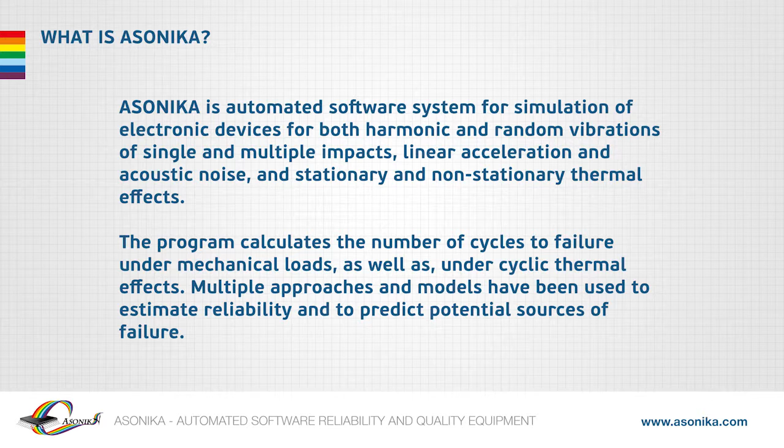The program calculates the number of cycles to failure under mechanical loads, as well as under cyclic thermal effects. Multiple approaches and models have been used to estimate reliability and to predict potential sources of failure.

Asonika is a substitution of electronics testing by computer modeling for heating, mechanical, electromagnetic, and other effects before its production. It's a considerable economy of funds and reduction of terms of equipment creation, with the simultaneous promotion of quality and reliability due to a reduction in the number of tests.

In the course of 40 years, we have been creating and have approved this breakthrough technology at many Russian enterprises, first of all in military, space, and aviation branches. The gist of the technology is the following.

Using the developed Asonika system with the help of a computer, one can oversee and prevent all possible damages and overheating of the electronic equipment placed at military, space, and civil projects. All this can be done in the course of several hours and in a very obvious way.

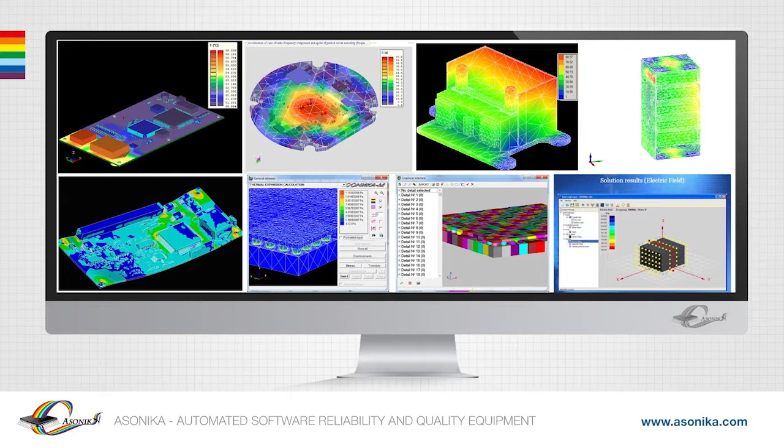Here are some fragments of electronic equipment damage and overheating acquisition. Places of possible overheats and mechanical overloads are highlighted in red. Asonika was used here.

Today the market is loaded with a quite ample quantity of programs, application program packages, and systems: Nastran, ASKA, Cosmos, ANSYS, MARC, etc. An analysis of the main characteristics of these programs shows that the best adapted for tasks of multiple survey and characteristics of electronics is the Asonika system, because there are no enumerated drawbacks of programs that allow this needed effect.

These drawbacks are listed as follows. First, an absence of models and algorithms which take into account peculiarities of functional implementation and the needed range of influence of stabilizing factors on the electronics output characteristics. Second, because of an absence of specialized graphic interfaces for normal design implementation of electronics, implementing normal design up to every electronic component of the computer needs much time in the required timescale.

Third, universal software packages demand special knowledge of an electronics developer in the sphere of mathematic modeling of mechanical processes, which it doesn't have in most cases. Fourth, the underlying models require much time with respect to electronics, from several hours to several days and months, for calculation of every electronic component, optimization, and dispersion.

Fifth, there are absent databases with required geometrical, physical, and mechanical parameters of electronic components and materials, which requires special research. Sixth, this complex is hard to work with, training requires more time, even for professionals.

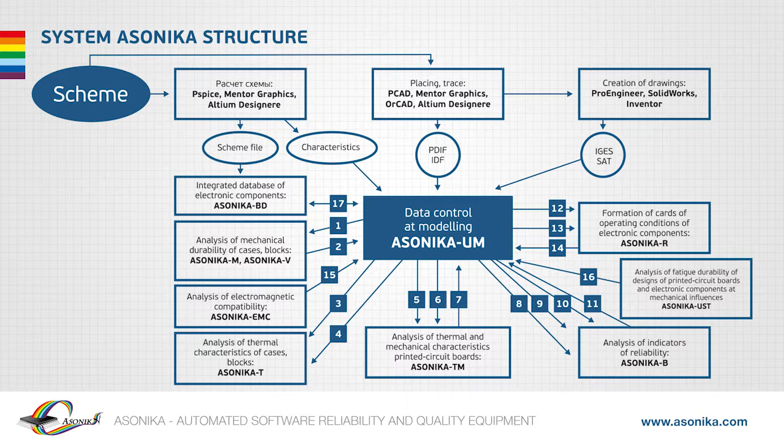In the middle, the converters of these CAD systems into the Asonika system are presented. In the lower part, there are subsystems of the Asonika system, creating the ability to model thermal, mechanical, fatigue, and electromagnetic processes, create operation mode cards, and calculate reliability taking into account real work modes of electronic components. In addition, a database of electronic components and materials required for modeling is integrated.

Why is Asonika unique? First, Asonika has reliable physical models and databases of the required properties of all materials and components. Second, Asonika has simple, intuitive interfaces that are easy to use by designers for rapid modeling.

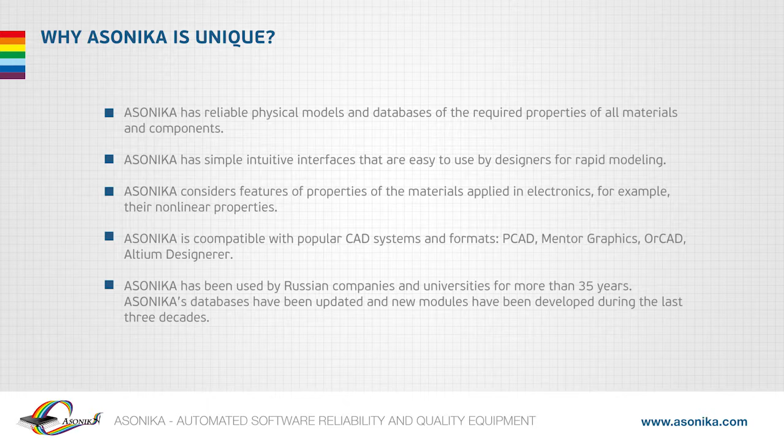Third, Asonika considers features of the properties of materials applied in electronics, for example, their nonlinear properties. Fourth, Asonika is compatible with popular CAD systems and formats: PCAD, Mentor Graphics, OrCAD, Altium Designer. Asonika has been used by Russian companies and universities for more than 35 years. Asonika databases have been updated and new modules have been developed during the last three decades.

How can Asonika help? Electronic devices are subjected to heat and mechanical stress. Failures can cause various problems, ranging from an inconvenience to a catastrophe. Prediction of reliability within expected thermal and mechanical effects is mandatory for any manufacturing of any electronic device. There is a growing demand for software programs for rapid simulation, which can reliably predict potential problems, sources of failures, etc.

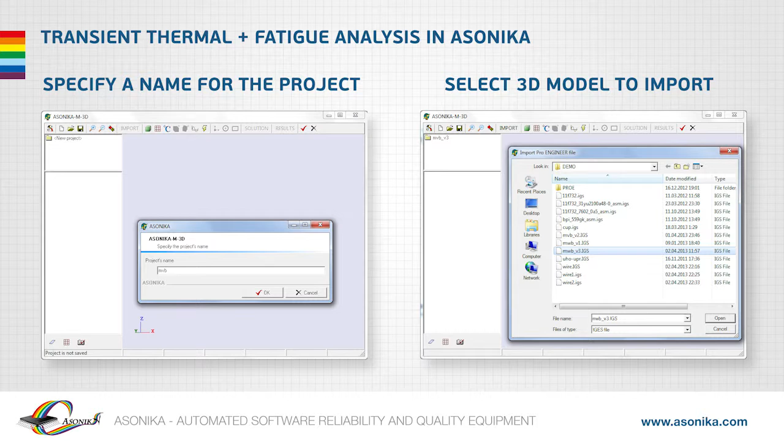Examples of modeling of a microchip in the Asonika M3D subsystem are presented. The subsystem allows the calculation of mechanical and thermal characteristics of microchips and blocks of electronics. This shows the transient thermal and fatigue analysis in Asonika, using a quarter symmetry model of a PCB and BGA package.

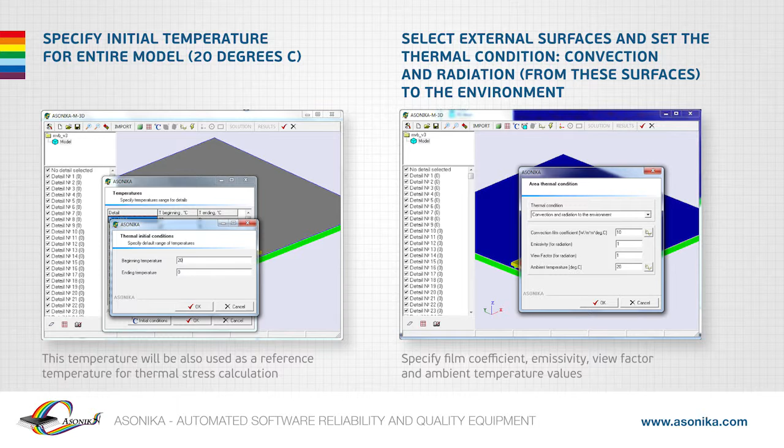Specify the initial temperature for the entire model, 20 degrees Celsius. This temperature will also be used as a reference temperature for thermal stress calculation. Select external surfaces and set the thermal condition, convection and radiation from these surfaces to the environment. Specify film coefficient, emissivity, view factor, and ambient temperature values.

Surfaces with thermal conditions become meshed. Symmetry planes should not have thermal conditions. Select the volume that represents the silicon chip and set it as a heat power source.

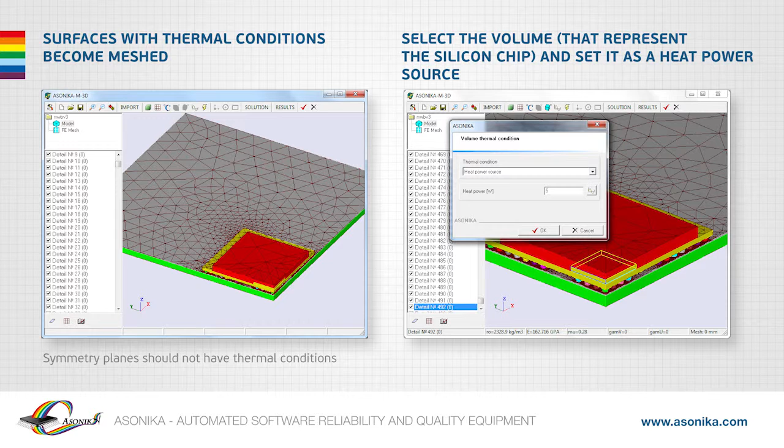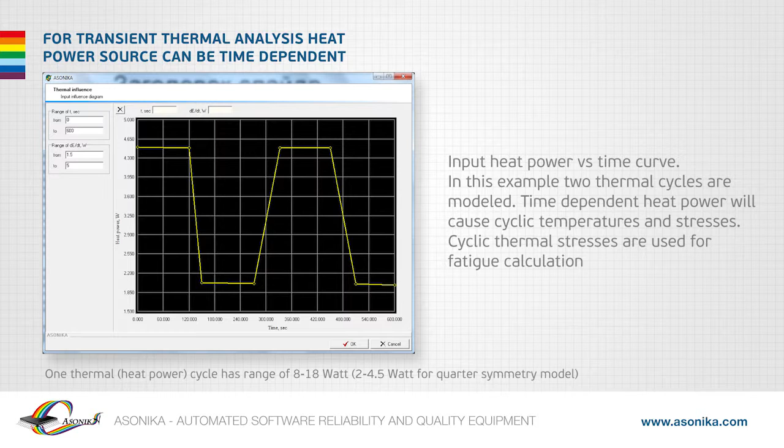For the transient thermal analysis, the heat power source can be time dependent. Input the heat power versus time curve. In this example, two thermal cycles are modeled. Time-dependent heat power will cause cyclic temperatures and stresses.

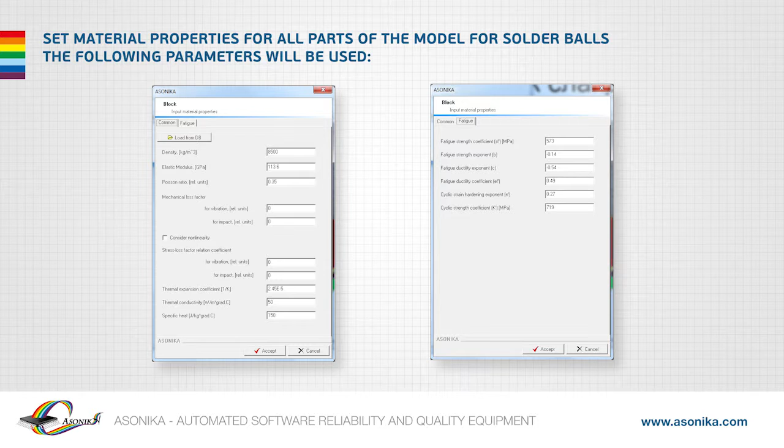Cyclic thermal stresses are used for fatigue calculation. One thermal heat power cycle is in the range of 8 to 18 watts, or 2 to 4.5 watts for the quarter symmetry model. Set material properties for all parts of the model. For solder balls, the following parameters will be used. Run the automatic FE mesh generation procedure.

Set solution parameters: specify the end time of the analysis, the time integration step, and the number of thermal cycles contained in the solution interval. Temperature-time curve at nodes: two arbitrary nodes were selected. Temperature versus time curves are shown for the two nodes.

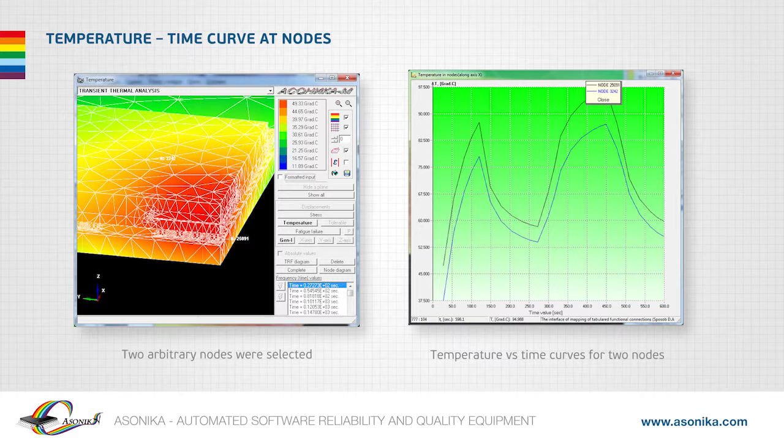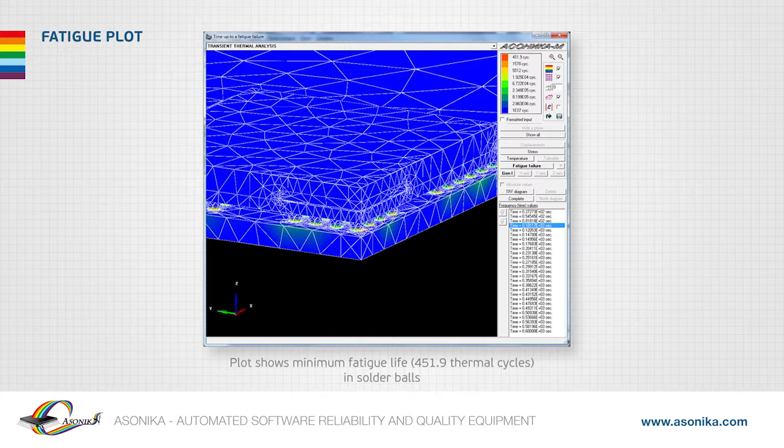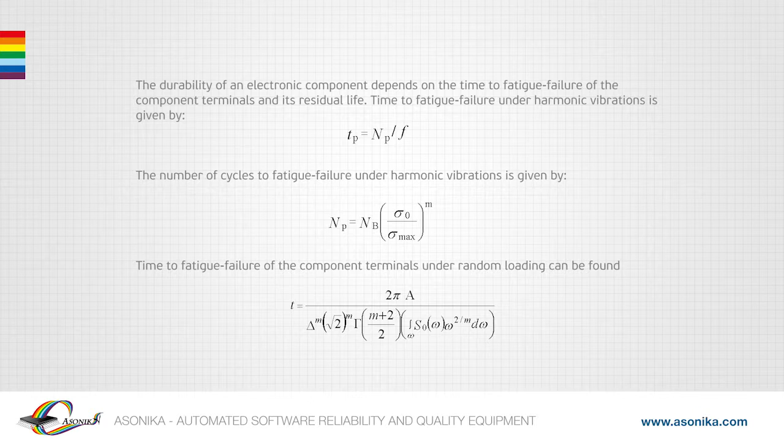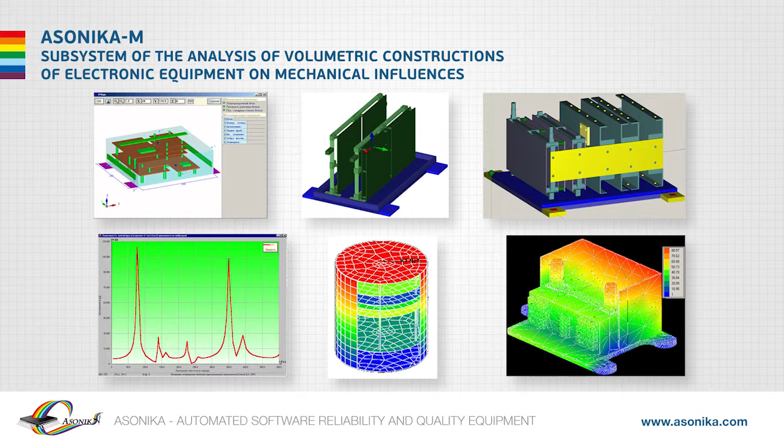The subsystem of the analysis of the volumetric constructions of electronic equipment on mechanical influences, Asonika M. On the slide, results of modeling of electronic blocks on physical impact are presented. They allow a developer to quickly make the decision of mechanical stability assurance: vibrations, bangs, and linear accelerations. The subsystem is well approved in space and aviation electronics.

Here, an example of construction modeling created in SolidWorks for the physical impact in Asonika M 3D is presented. In this case, a 3D model is converted and the model is automatically built in the Asonika M 3D subsystem.

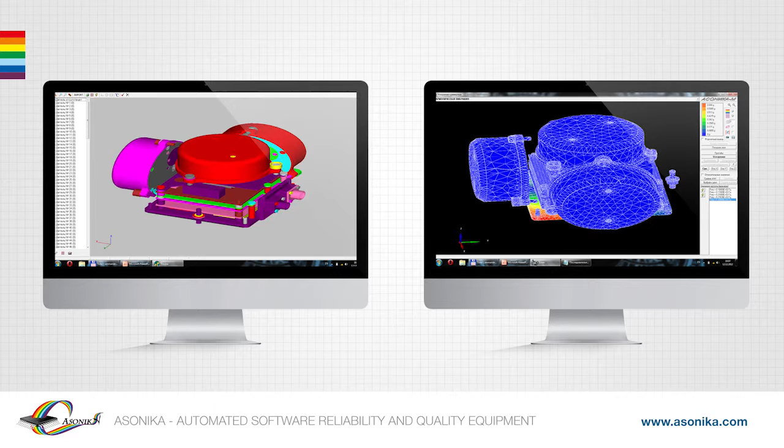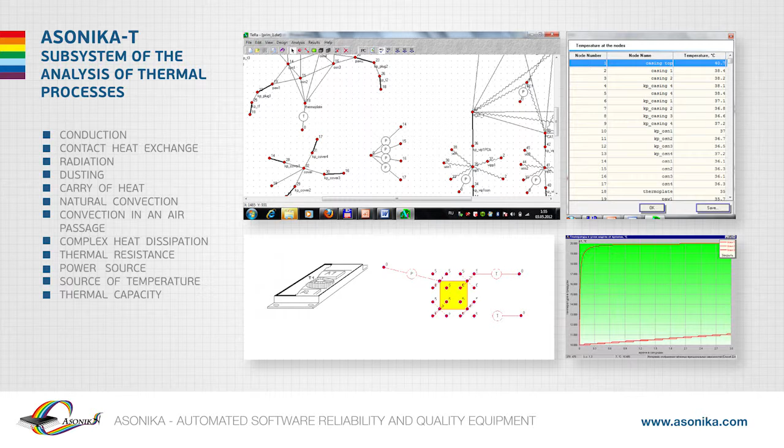The subsystem of the analysis of thermal processes is Asonika T, an analysis of stationary and non-stationary thermal regimes of selected boxes. Blocks of equipment working at natural and forced convection in an air environment at normal as well as decreased pressure and in empty space in space conditions. There are interfaces for easier implementation of normal design.

The Asonika T subsystem allows for the conducting of thermal calculation of any construction, including non-electronic. This is its advantage. However, a user builds a thermal model of the construction himself on a computer screen. This model is easy to understand for those who know what thermal conductivity, convection, emission, sources of temperature, sources of power, and sources of thermal capacity are.

The Asonika TM subsystem is used for printed circuit boards. During the analysis of a selected construction, temperatures of separated isothermal volumes are defined, and curves of temperature-time relationship for the non-stationary thermal modes are created. Models of thermal processes, Asonika T and Asonika TM.

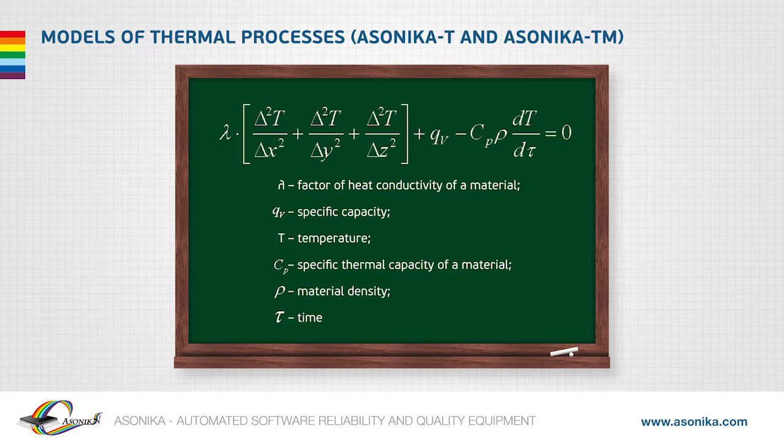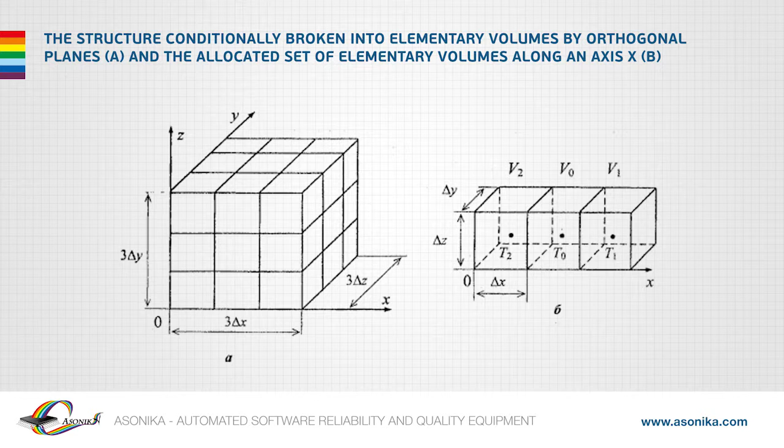The structure is conditionally broken into elementary volumes by orthogonal planes, A, and the allocated set of elementary volumes along an axis X, B. A fragment of the electric scheme, modeling of the non-stationary heat transfer processes through the elementary volume.

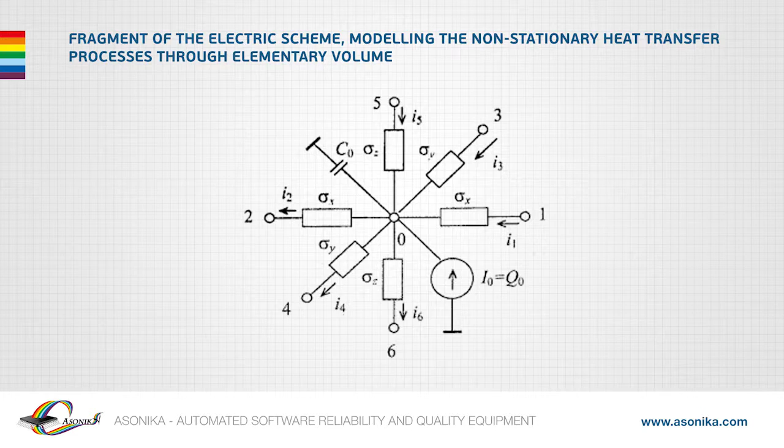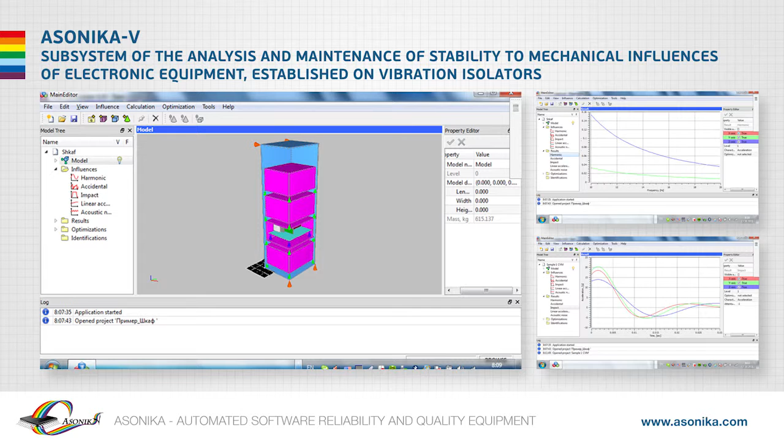Here is the modeling of boxes, racks, and blocks construction installed on vibration isolators in case of an effect of vibrations, bangs, linear accelerations, and acoustic noises. With the help of the Asonika V subsystem, it can be analyzed. The subsystem allows for the identification of the parameters of vibration isolators, as well as the optimization of their parameters with an aim of construction load decrease. Here is a model for analysis of a vibration isolation system presented.

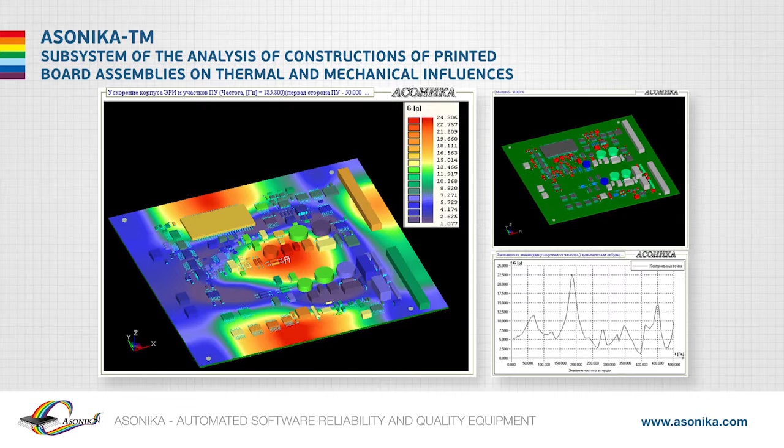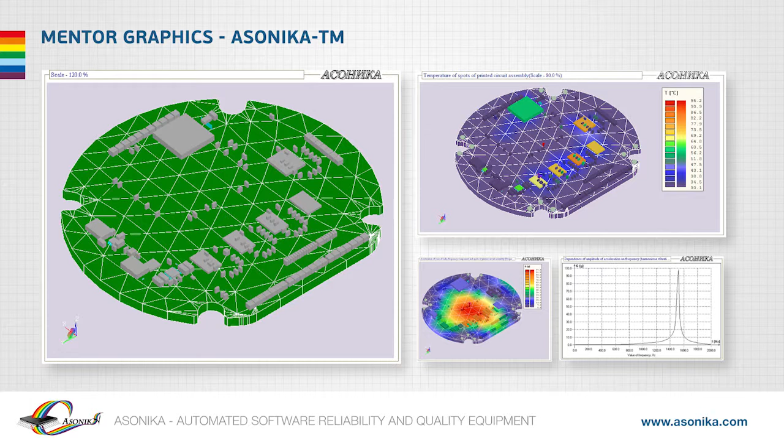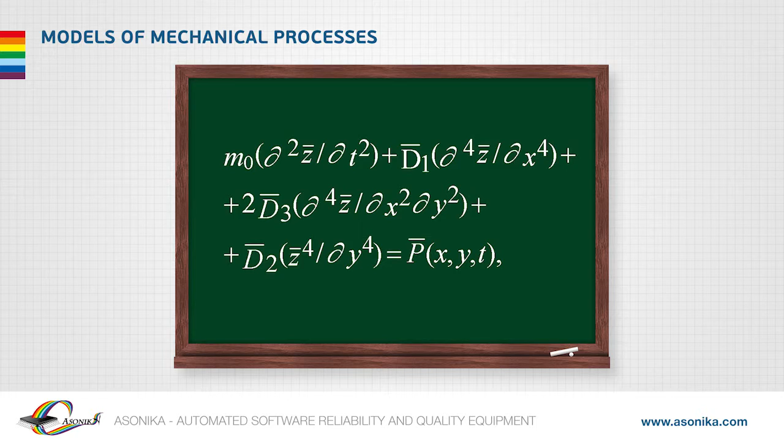The subsystem of the analysis of constructions of printed board assemblies on thermal and mechanical influences, Asonika TM. As a result, one can get accelerations and temperatures of all the electronic components in comparison with acceptable values. Models of mechanical processes, Asonika TM. A mechanical model of a printed circuit board.

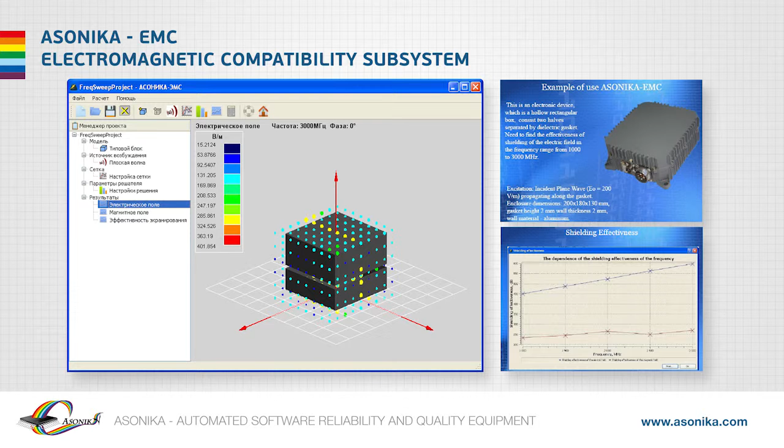The Asonika UST subsystem is presented. The analysis of fatigue durability of designs of printed circuit boards and electronic components on mechanical influences. The Asonika EMC subsystem is presented. Electromagnetic compatibility subsystem: electric and magnetic field intensity in the frequency range, as well as screening efficiency.

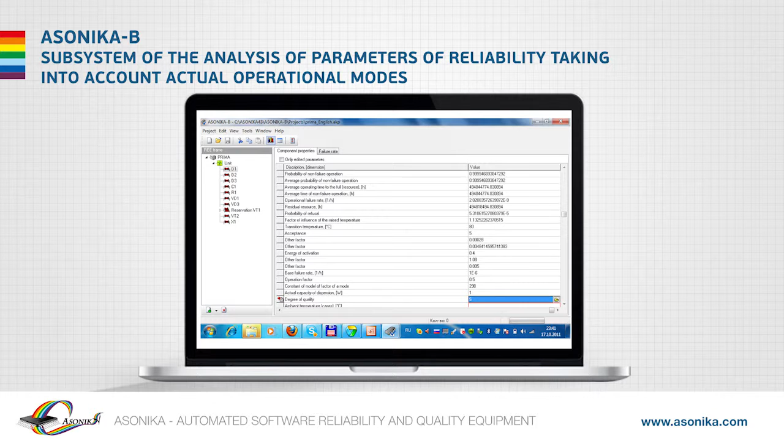Asonika B is presented. Subsystem of the analysis of parameters of reliability taking into account actual operational modes. The Asonika V subsystem allows for the analyzing of boxes, blocks, printed circuit boards, and electronic components, and solves the following problems. 1. Definition of reliability factors of all electronic components.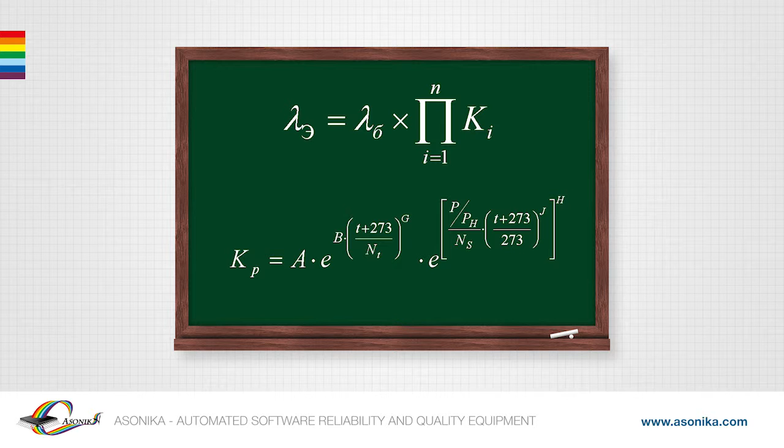2. The statement of the need and evaluation of effectiveness of equipment backup. Exploitation breakdown rates, the probability of serviceability, and an average non-failure operating time of equipment may be obtained as a result of the modeling. Reliability models, Asonika K. Integrated database of electronic components, Asonika BD.

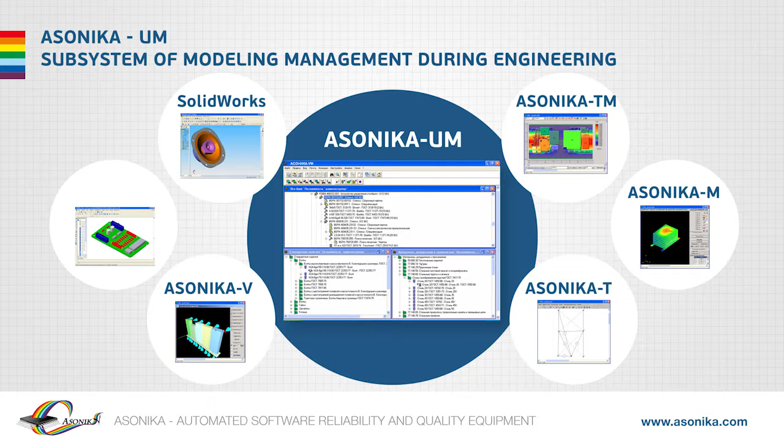Asonika UM, the subsystem of modeling management during engineering. The Asonika UM subsystem allows for the integration of CAD systems implemented in an enterprise, Pro Engineer, PCAD, Asonika, Compass, AutoCAD, PSpice, etc., and controls data communication between subsystems while modeling in the process of construction design of electronics. The subsystem is integrated with any PDM system used at an enterprise.

In the course of projecting, the subsystem allows for forming a complex electronic model of electronics within the limits of mathematical models of thermal, electrical, electromagnetic, and mechanical processes, and a mathematical model of reliability and quality of equipment.

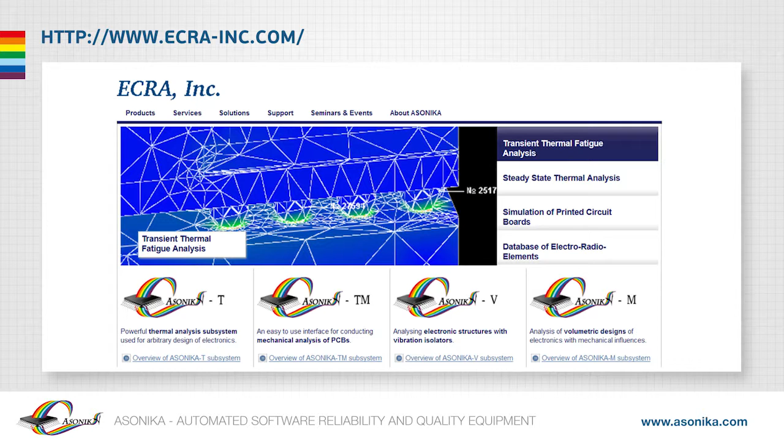A great number of teaching guides and monographs have been released. The latest books on the Asonika system are presented in Russian and English. Asonika system training for teachers of the International Technologies Institute, India. The Asonika system site in a business incubator of Arizona State University, the USA.